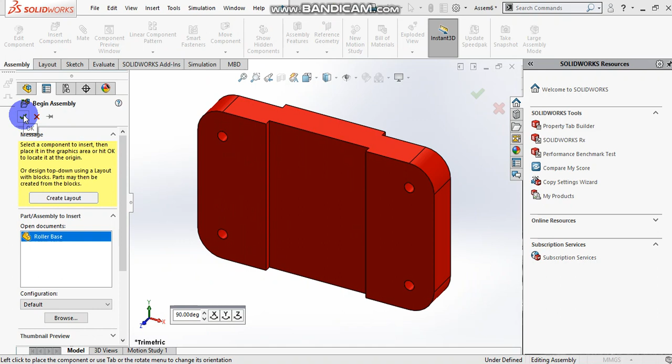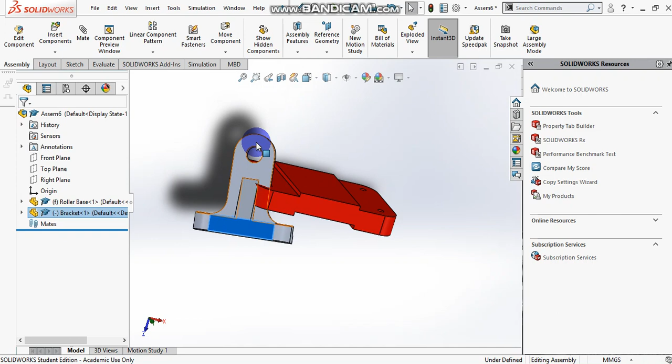Then you can start rotating your models. I will insert the bracket, the one bracket first. Then rotate your bracket. The bracket should be like this.

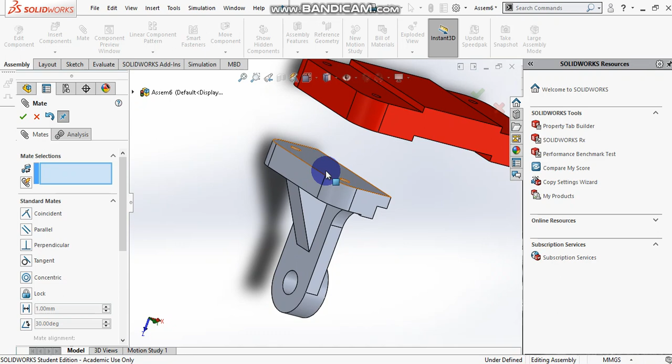Then you can start to align the hole. Select the screw hole, select first screw hole, you will form concentric. Select second screw hole, so both screw holes are aligned. This face, after it's made, should form coincident with this face. Done.

Then second component, I will insert the bushing. I will select the bush.

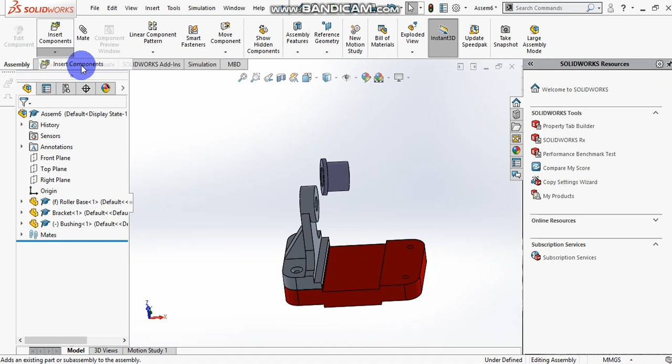Then let me insert the shaft. The shaft here should be attached here. If you completely move in, it should meet here and here, coincident.

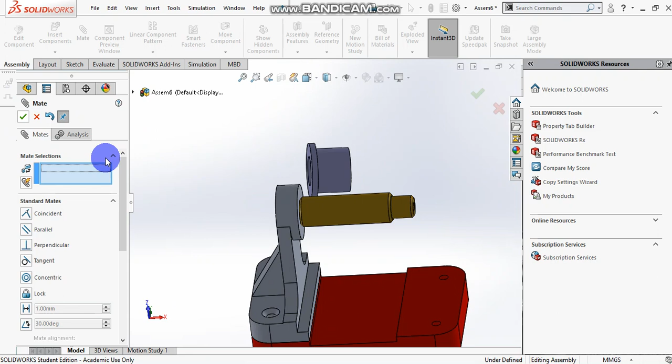Now the bush. The bush here and here. Let me select again, here and here should form coincident.

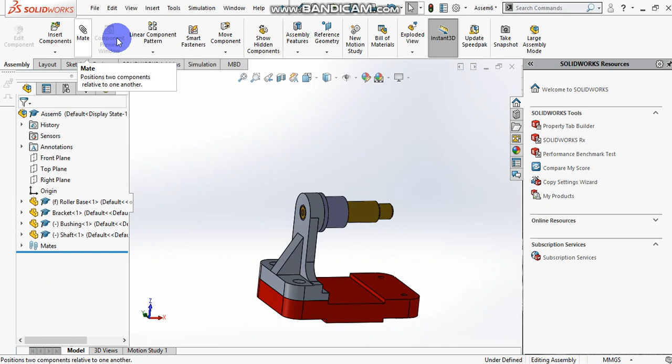Then let me insert the wheel, the roller. Insert the roller. Then the roller should attach with the bushing.

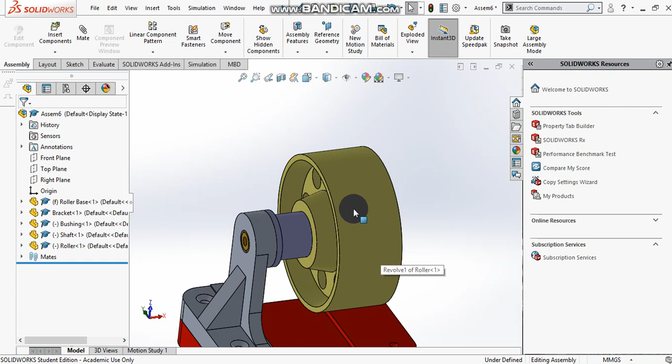That's it. We just leave it like this because later on we're going to use a width mate.

And we need to complete this part here. Why not complete this part by adding the components? Because I want to show you that we can use the mirror components feature to mirror it.

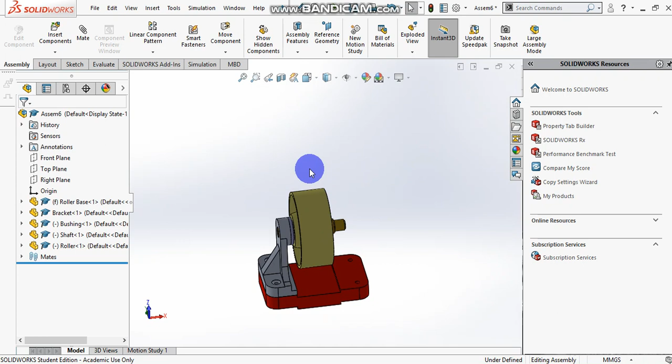The first thing we need is to find the plane that stays exactly at the middle of the base. From here you will see the right plane is exactly at the middle. Let me show the right plane. So see, your right plane is staying at the middle of the base.

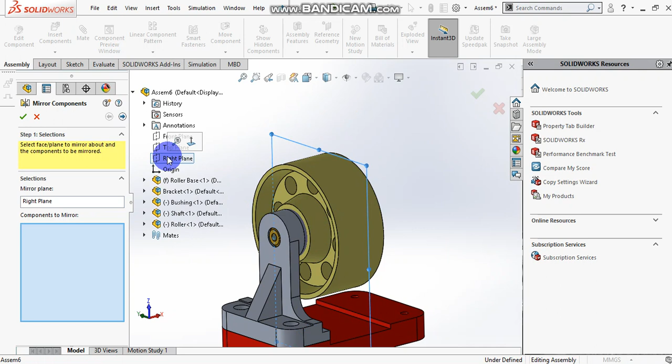So from here we can use mirror component. The mirror plane, I'm going to select the right plane, seeing the right plane is at the middle. So the components to mirror, the bracket we're going to mirror, and the bush we're going to mirror. So we have only two components to mirror. Then you click confirm. So we have done the mirror.

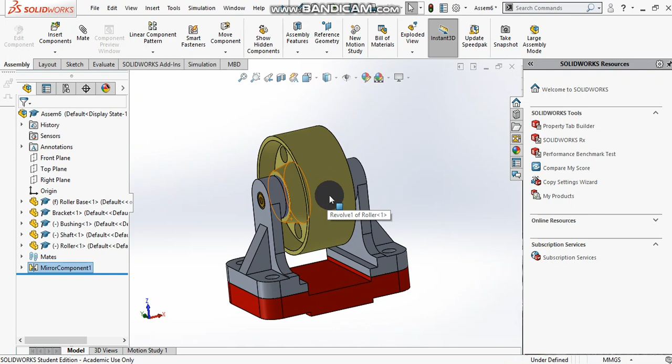Okay, from here, now your bush is keep moving. If you check from the view here, the bush actually stays at the middle between these two brackets.

So what we can do, we can use advanced mate. You can use a width mate.

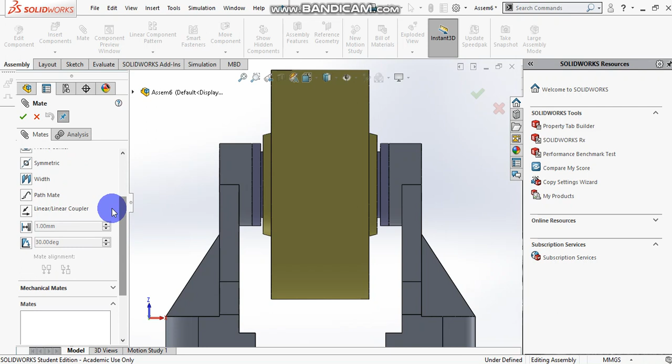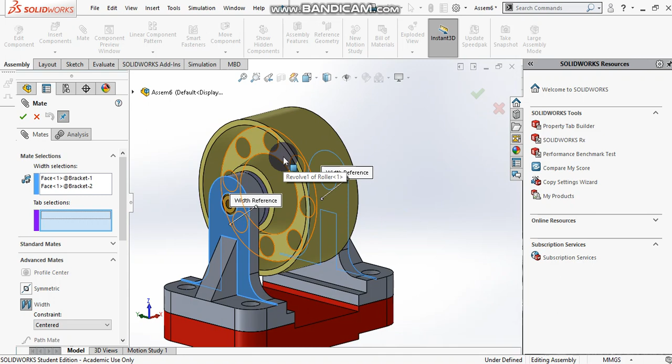So first the width selection, I will select the face at the bracket here and here as the reference, and then the tab selection is the face that you want them to stay in between these two width references. I will select this face and this face. Now I have done, you complete, confirm.

Now your roller stays at the middle, so you see it won't move anymore.

Now I'm going to show you how we can use the toolbox component. For the toolbox component, you can find it under design library. You click on toolbox component. First time you use it, you need to add it in now.

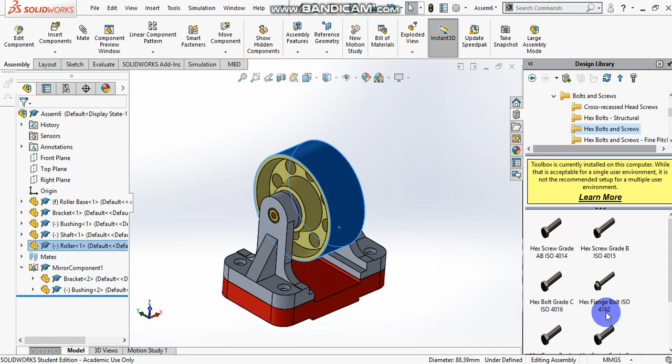Then if you check your exercise questions, the standard we use is ISO. So under here we need to find bolt. What kind of bolt do we use? We're going to use a hex flange, so we need to find this one, hex flange bolt ISO 4162.

Okay, so for insert, let me select the previous one. We're going to use this bolt with the length of 20.

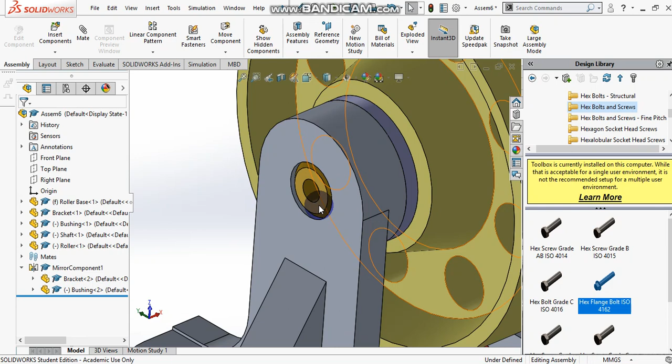So to insert the toolbox component, first you need to drag the screw you want. First you point in the hole, you see it will pop out the symbol like this, meaning it will detect the size. Then you point here, it will form coincident mate with the face.

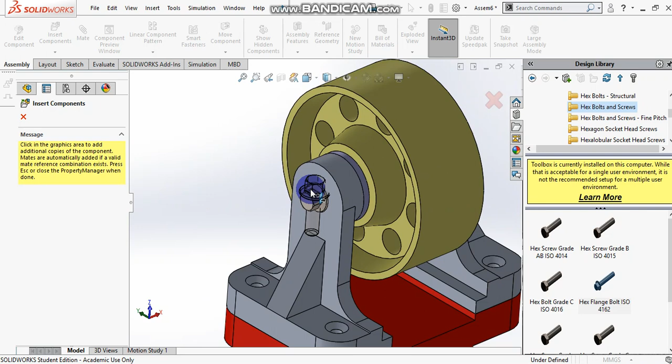Then you choose the length. You can see here the size is M6, the size for the screw hole. So the length here we need is 20. Then confirm.

After you use this one with size 20, you can plug in here. You just point on here, it will automatically attach the screw.

So the other one, we need a countersink flat screw. Where can we find a countersink screw?

Yeah, so we need a countersink screw, 7046, this one.

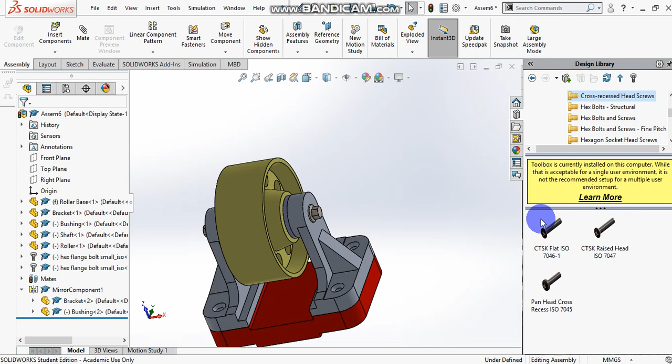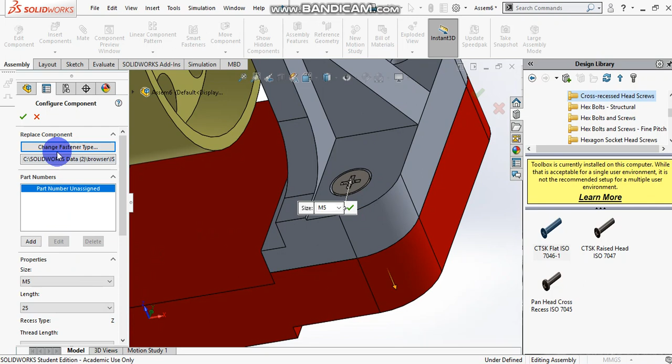Same also, you just drag one of the screws, you point on the hole first, then you point on the face that you want to form coincident, then you will move in. See, the size is M5, automatically detected. The length we need is 25. Then we confirm.

After confirm, the same size of screw, it will be like this. You just point on the hole, click, you will place the screw. You point on the face here, click, it will plug in the screw. You point here, click, it will plug in. Then if you want to discontinue, just press close.

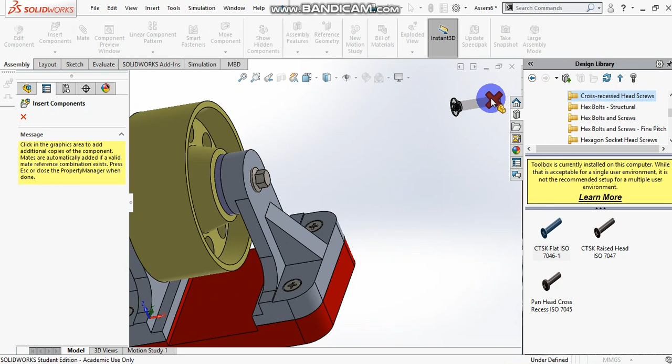So the model of your roller view is complete.